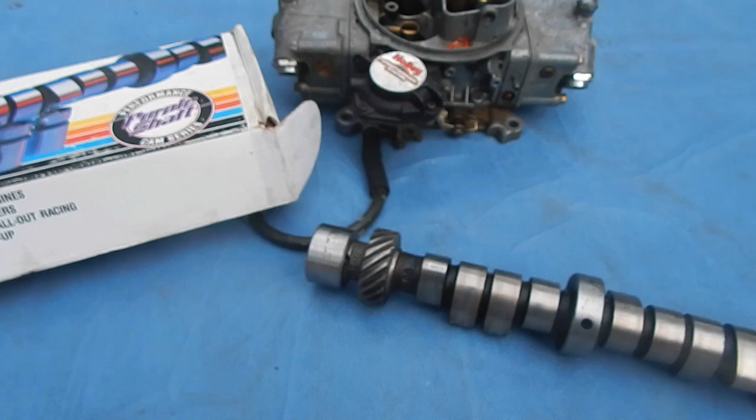I know there's a lot of information out there already on this, but I just want to give my take and maybe help somebody make a cam selection. I'm sure I can mess somebody up. A lot of people want to know, I want to buy a cam for my car, but I really don't know what I should get.

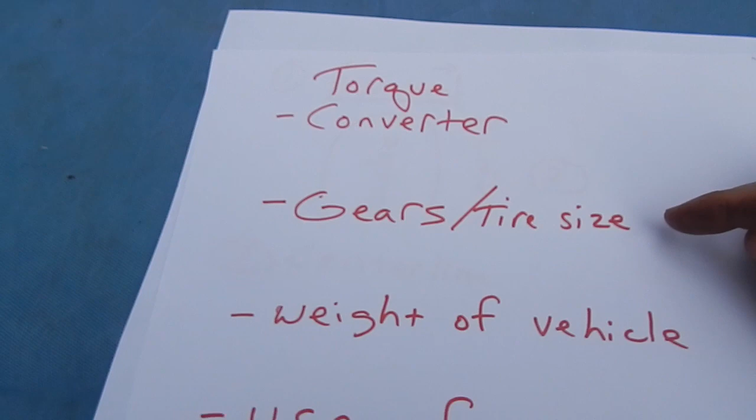Really only the owner of the car can answer that. What torque converter are you going to run? What's your gear and tire size? What's the weight of the vehicle? And most of all, what do you plan to use the car for? And don't forget compression. A 7.8-to-1 motor isn't going to like a lot of cam, like a 9.5-to-1. That compression is important when selecting a cam.

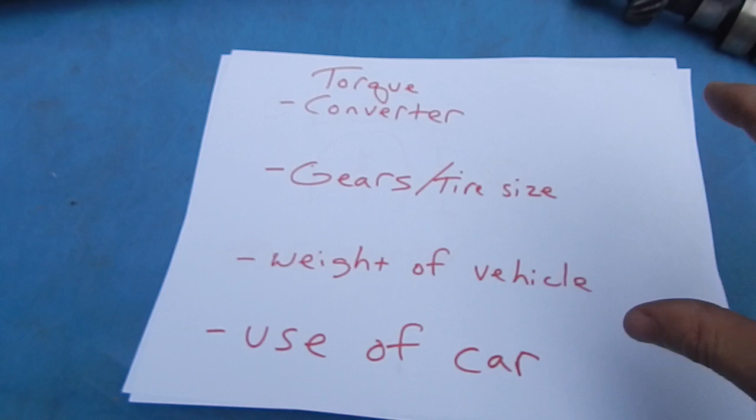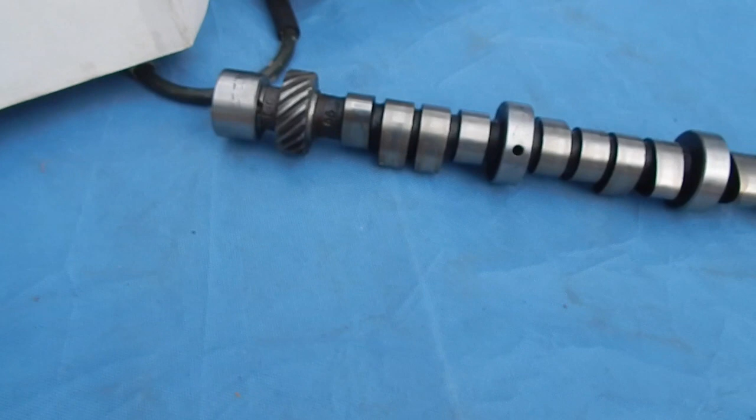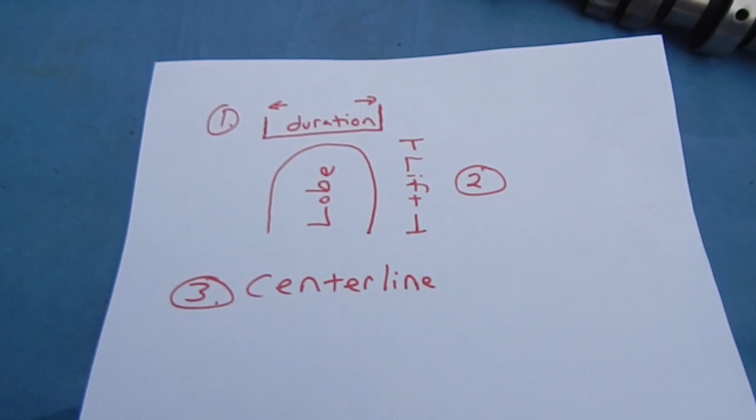You can call a cam grinder and have him custom make you one, and that's a good way to go about it, but he's going to want to know this information. What if you don't want to call a cam grind shop and tell them, make me the best cam for me? What if you just want to pick something off the shelf? There's really just a small amount of criteria I have to offer to help you make a selection. I'm not going to get into timing events of a camshaft and all that, there's people way smarter than I am on cams. I'll just show you some basic features to help you make a selection.

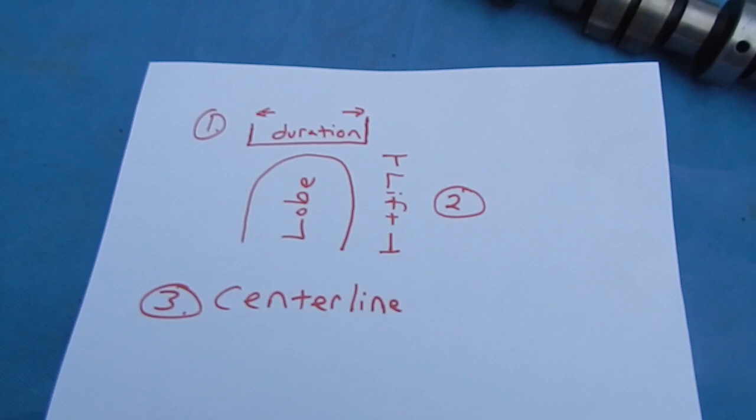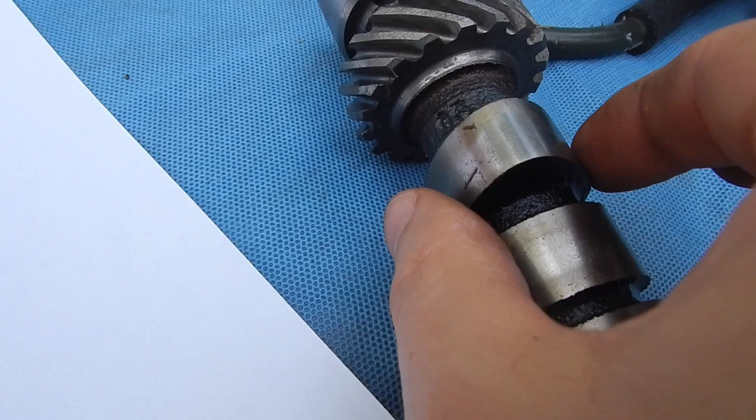First of all, understanding the lobe. This right here is a lobe. Duration. If this is my lobe, duration is the amount of time that valve is held open. Lift. How tall is that lobe? Yeah, that's the lift of it.

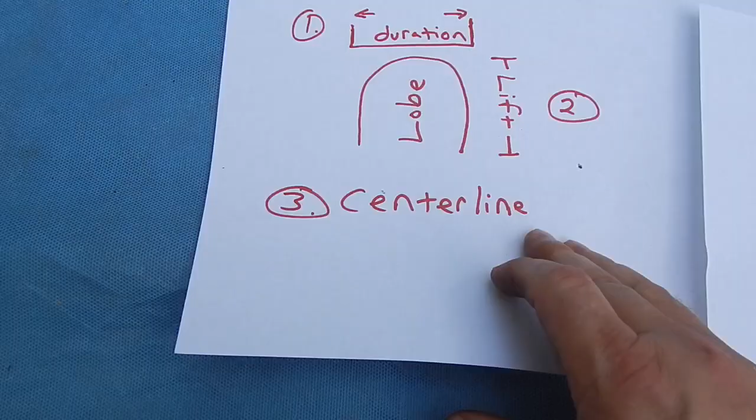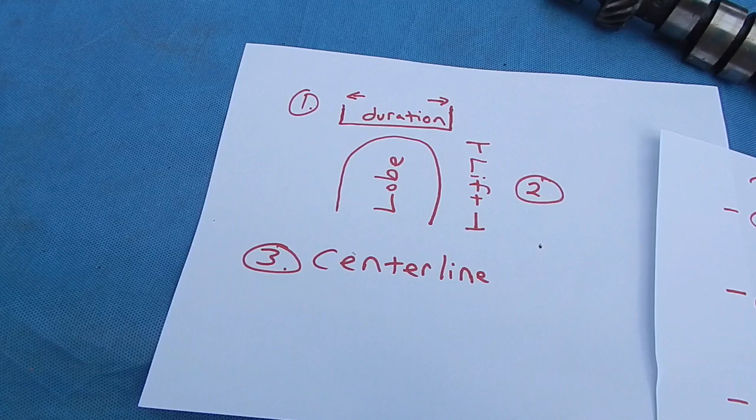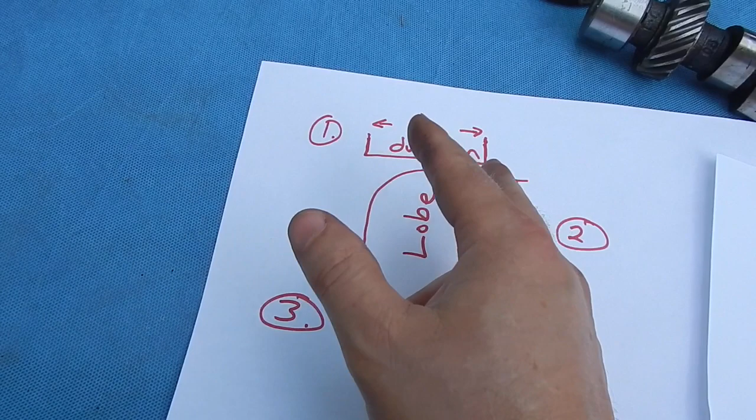Another thing that plays a big part is the centerline. If it's a true street car and it's not going to see a ton of racing, it's going to be driven mostly normal use, I like that centerline around 112. If it's 110 to 112, let's say, that centerline, look at that. A nice street cam to me is a 112 centerline or a 110 centerline, 220 duration at 50, 480 lift or 470 lift.

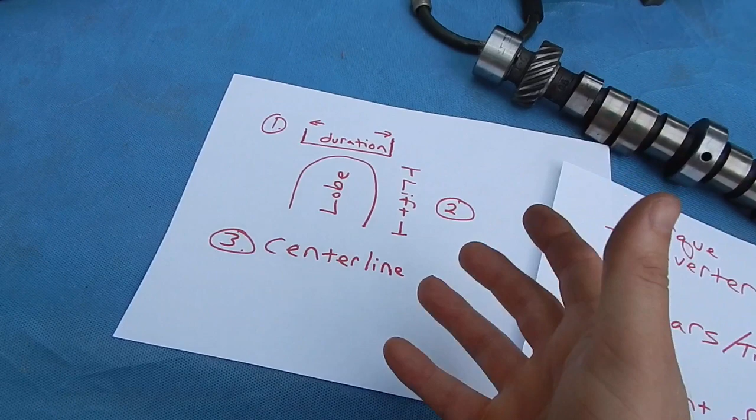That's really nice if you got 3.23 gears and a tight torque converter, and it's going to see mostly highway and cruising type use. And that's my advice on that. But these are the things you have to look at and understand when you go to select a cam.

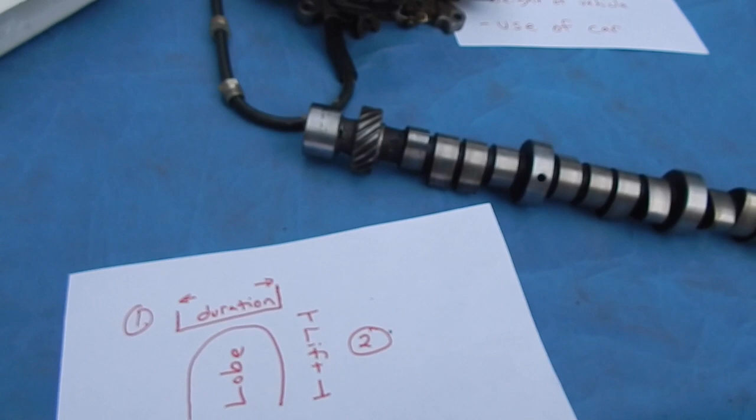It's just not as easy as saying, hey, I want a big cam, I want that lumpy sound when I sit at a stoplight. You may hate the cam soon after that. Sometimes the best way to add some low-end spunk is to leave the original cam in there and recurve your distributor and pull some initial into it, and make sure your timing set below is new and accurate and not full of slop, costing you some low-end off-the-line snap when you go to pull that boat out of there.

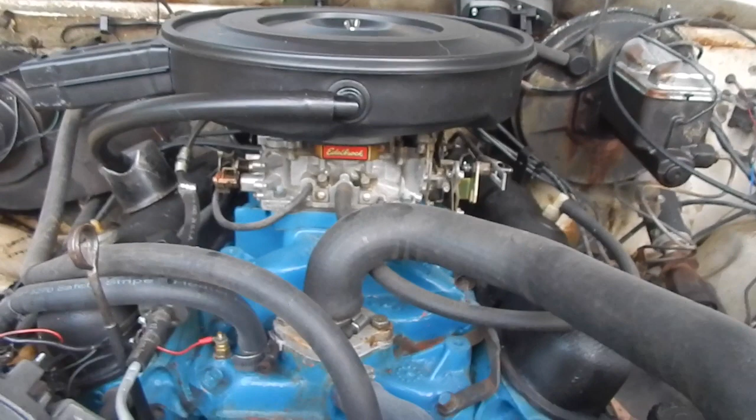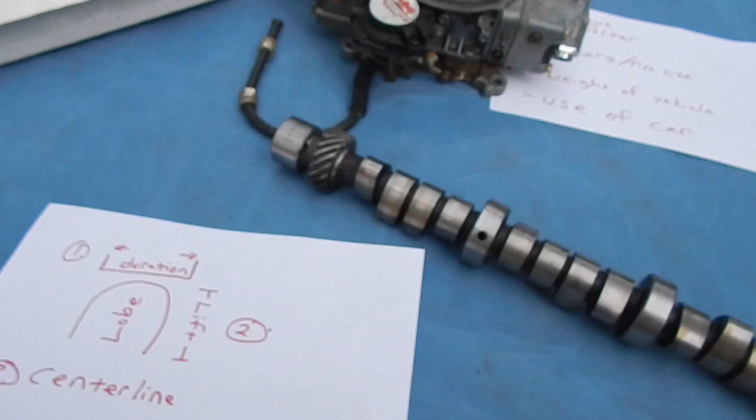You can add more low-end snap sometimes by working with other things than doing a cam swap. Sometimes the best cam for your 4-wheel drive or your 3/4 ton pickup that's never going to see over 3,000 RPMs, just going to be driven normally, sometimes your factory cam can work as good as any, and you're going to get more out of that than if you just up your lift and duration. You might be able to buy an RV cam that adds a little bit to it.

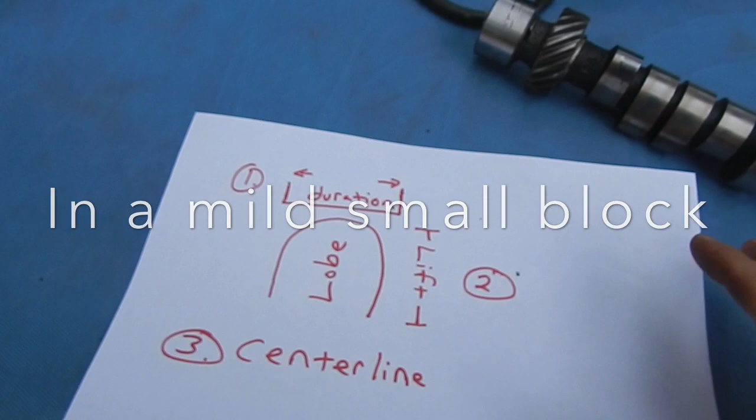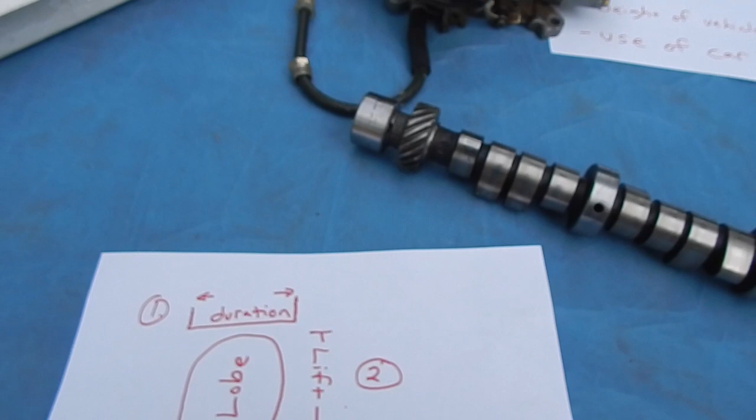But my rule of thumb is if it's going to see mostly street use with a lot of highway gears, you want duration. Don't look at advertised, look at 50, duration at 50. I like that to be right around 218 to maybe 226. That'll do a lot more for people than somebody throwing in a 238 or 240 duration at 50 with over 500 lift if they're running 276 gears or a 323 gear with a stock converter.

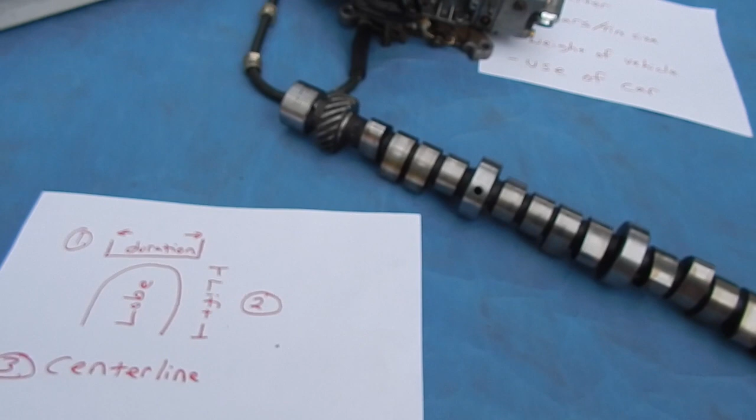People don't realize that. The difference in those two cams I just mentioned, somebody putting in something like this - this cam's like 240 duration at 50 - if you put it in the wrong situation, it'll hurt your performance. You may not receive any benefit till right before you're ready to shift, and then it'll fall on its face again when you shift gear.

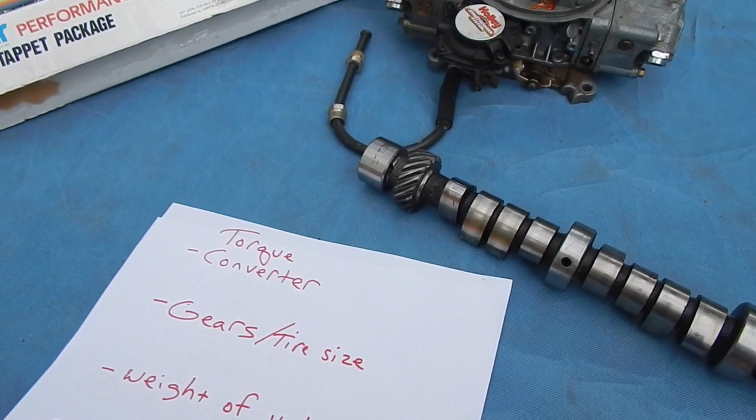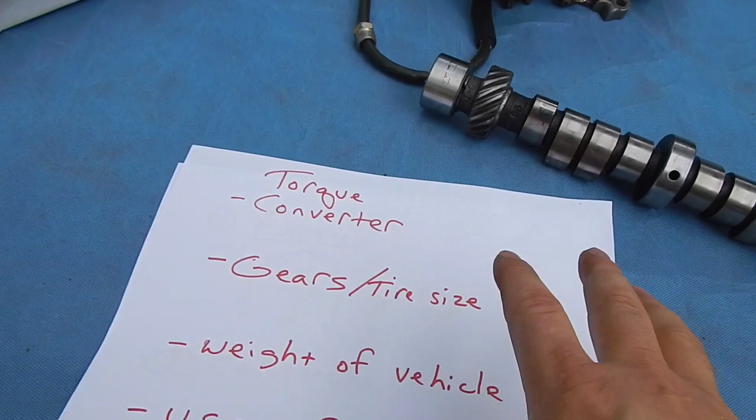You want a cam to match your gears, your torque converter, and your weight. And if you said, well I really just want that lumpy sound, you might have to look at a whiplash cam from Hughes or a thumper cam or something like that to get your noise. But if you're trying to get into that weekend warrior type of mentality, and you're trying to set up your car for the first time, and you're going to do the 4-barrel header, maybe add some more compression and some better flowing heads, and you got your 410 gears in there, and your 10-inch Street Fighter converter.

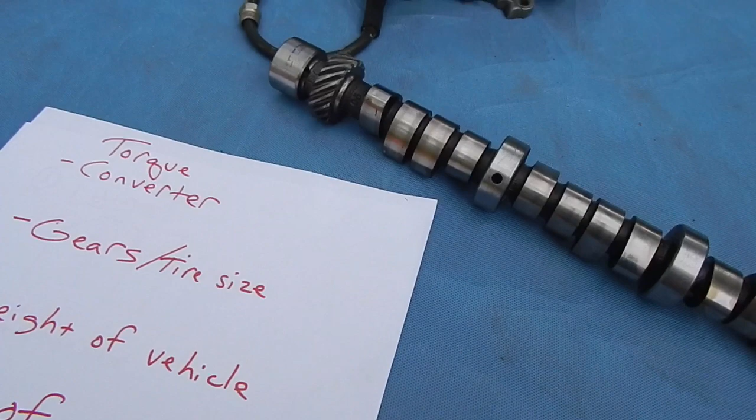Well then if you're that guy, you're probably going to be much happier if you go with a 238 to 244 duration cam, and you start talking 510 lift or 520 lift or 530 lift cam. You're probably going to set yourself up more to be successful, especially if you got a car that weighs maybe 3,100 pounds. But I am not picking the same cam for that van as I would for this Duster.

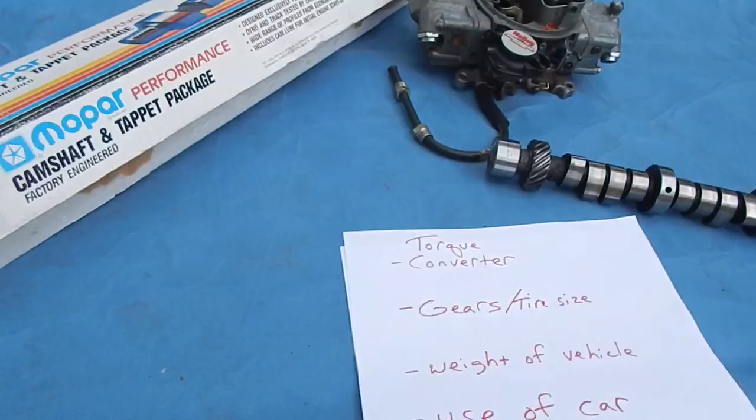No way. One of the number one things people do trying to add power to their car is overcam it. And you want to be cautious of that. Overcamming a car is only cool when you start it up and listen to it idle. It is not cool when you have to cut holes in the floorboard to be a Flintstone car to help yourself out of a hole.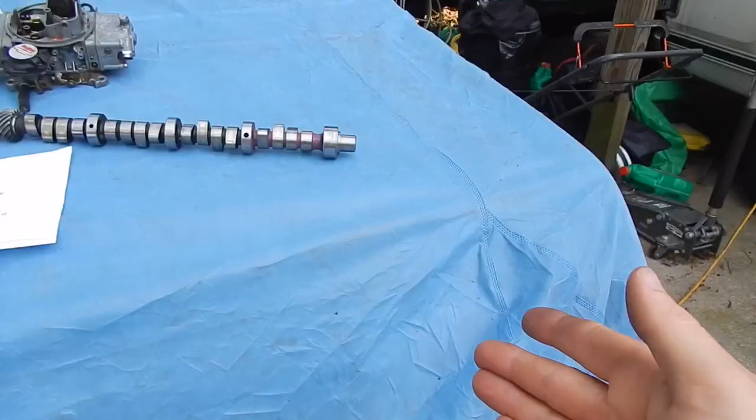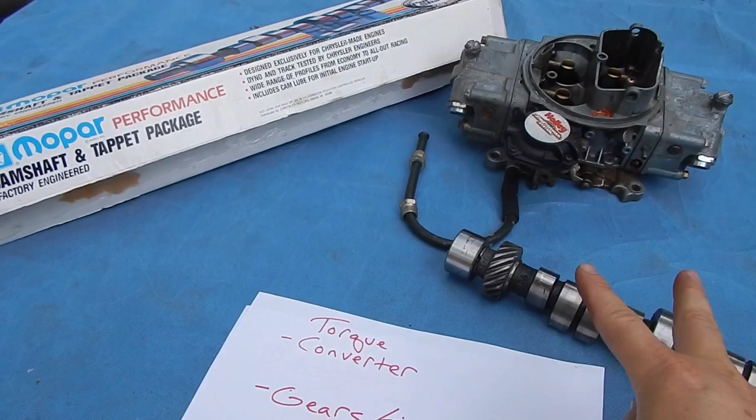So consider, is it for a van? Is it for a Plymouth Duster? What's the intended use? How are you going to drive the car? How often are you going to drive it? All these things play a part. When you're picking that cam and you can't decide between two of them, and you talk to some people and you're getting recommended, most people are happier when they select the smaller of the two.